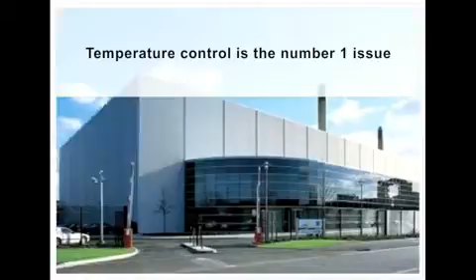Temperature control is the #1 issue faced by owners and operators of pharmaceutical warehouses. The Medicines and Healthcare Products Regulatory Agency, or MHRA, is the government body that controls standards within the pharmaceutical industry. John Taylor is the Quality and Standards Manager for the MHRA. He's the leading authority on this subject and is greatly respected by all parties in the industry.

We asked John, what's the greatest challenge facing the pharmaceutical industry with regards to the storage of medicines? Well, the greatest challenge concerning the storage of medicines is to ensure that products are stored under conditions compatible with maintaining their quality. And in this regard, of prime importance is the control of storage temperatures such that products are not exposed to extremes of temperature outside their labelled storage requirements.

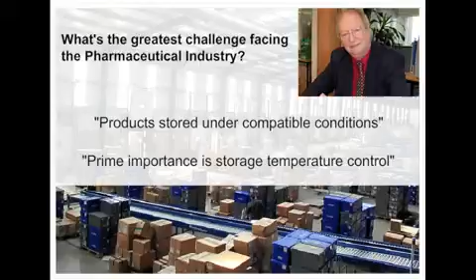Why has this all of a sudden become an issue? It's only during the last 10 years or so that regulators and industry in particular have recognised that distributors have a very important role to play in maintaining product quality from manufacturer to patient.

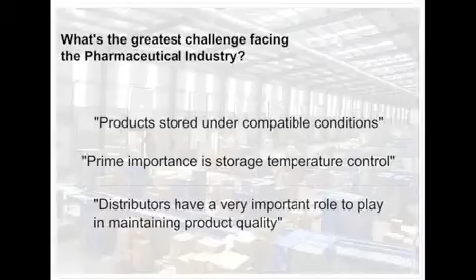The points raised by John are only part of the problem. There are other issues which not only affect the pharmaceutical industry, that add to the problem of temperature control. First, we're seeing great improvements in warehouse construction, and as a result of tightening regulations, buildings now require less energy to keep warm in winter, with the emphasis now changing to keeping them cool in the summer.

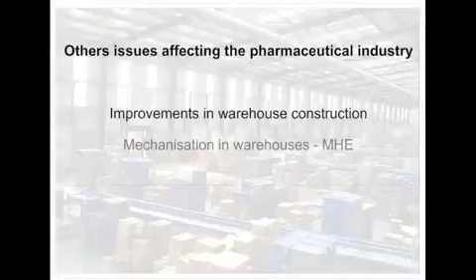Additionally, the use of ever-increasing amounts of mechanisation in warehouses and the addition of mezzanine floors means that warehouse temperatures are increasing. Add to these issues the effect of global warming. It's widely accepted that global warming is a reality, and summertime temperatures are set to increase beyond the record-breaking temperatures of the summer of 2006.

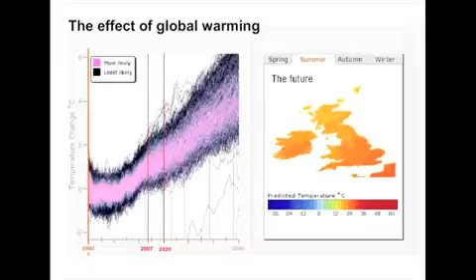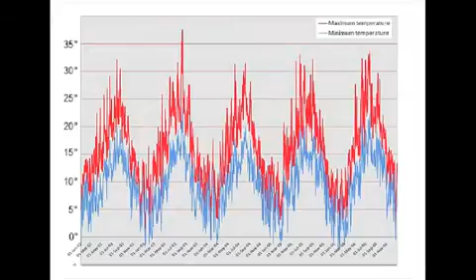Research shows that global warming is directly related to the increasing volumes of greenhouse gases, with CO2 being one of the main offenders. This graph shows outdoor temperatures recorded at the London Weather Centre. Typically, for a warehouse to comply with MHRA requirements, some form of ventilation will be needed once the outside ambient reaches 18 degrees. Once the external temperature exceeds 23 degrees, you will need to use some form of mechanical cooling to keep internal temperatures below 25 degrees.

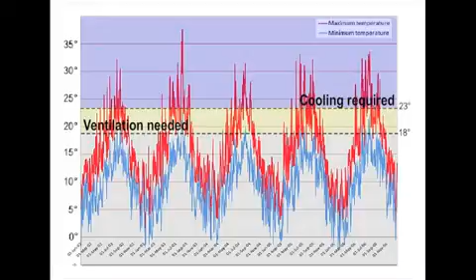As you can see from the graph, 18 degrees was exceeded on a significant number of occasions during the 5-year period, nearly 150 days per year in fact. Excursions above 23 degrees, although less numerous, occurred on over 60 days a year.

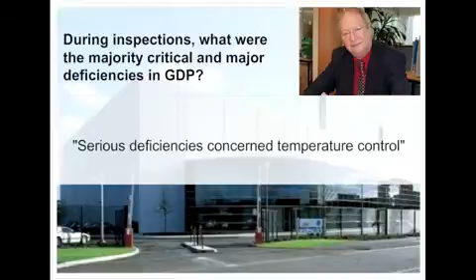We asked John Taylor to explain, during the inspections that were carried out last year, what were the majority critical and major deficiencies in GDP, and how were these failings addressed by the MHRA? Well, the majority of critical and major deficiencies, these we class together as serious deficiencies, reported last year, concerned temperature control and monitoring in general storage areas. It's apparent then that unless some form of ventilation or cooling plant is installed in these warehouses, it's often difficult to fully comply with the recommendations.

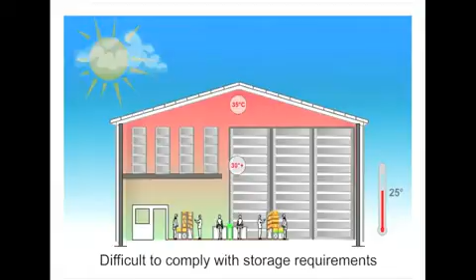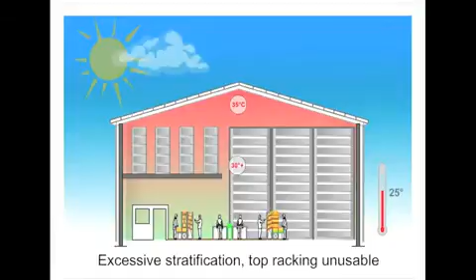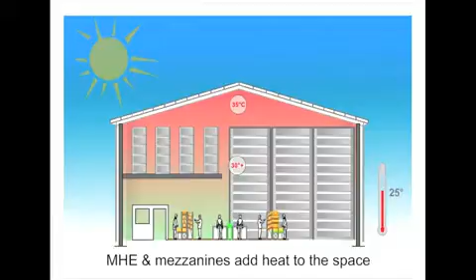Here we show a typical pharmaceutical warehouse in summer without any form of ventilation or cooling. What you have is excessive levels of stratification, as the hot air accumulates at high level in the warehouse, making the top levels of racking unusable for certain temperature-sensitive products. Some distributors have to relocate stock to lower levels and even put the stock close to open doorways to keep cool. This can be further aggravated where MHE and mezzanines have been added. A warehouse in the UK without either ventilation or cooling cannot comply with the manufacturer's storage requirements and MHRA standards.

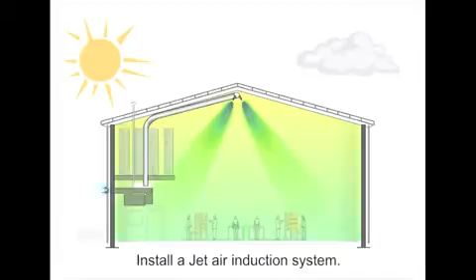So, what alternative do warehouse operators have? Install a jet air induction system. So, what is an air induction system? It's the most energy efficient and low carbon method of cooling and ventilating a pharmaceutical warehouse. The system offers even temperature distribution and minimal levels of stratification.

Temperature sensitive products can be stored anywhere within the warehouse without fear of being in breach of the manufacturer's temperature storage requirements. With its flexible design, the system is easy to modify if the warehouse layout is changed in the future. The system relies on mechanical cooling only when it's needed. At all other times, it utilises fresh air for free cooling of the space.

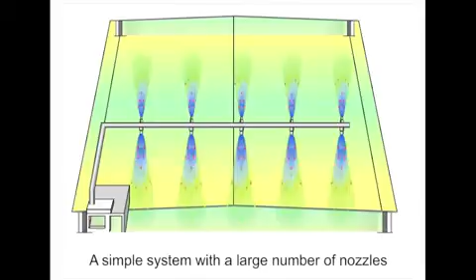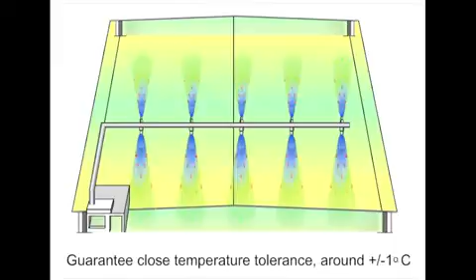Here's a plan of a simple system. As you can see, we have a large number of nozzles. As a result, we can guarantee a very close temperature tolerance within the warehouse, usually around plus or minus 1 degree Celsius throughout the entire space.

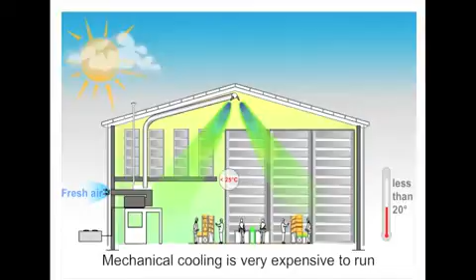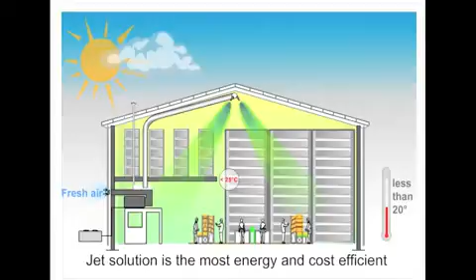Mechanical cooling is a solution to address the MHRA temperature requirements. However, on its own, mechanical cooling is very expensive to run, consuming significant electrical energy, producing higher CO2 emissions. The JET pharmaceutical solution is designed to maintain temperature conditions and meet MHRA standards, doing so in the most energy and cost-efficient manner.

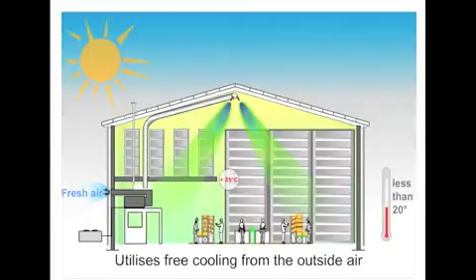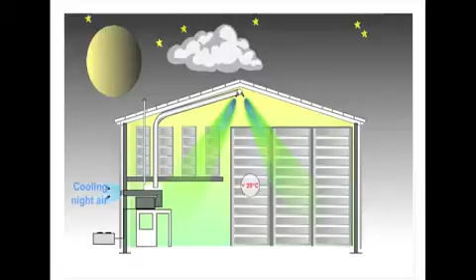The majority of the time, the internal warehouse temperature can be controlled at an acceptable level by utilising free cooling. Free cooling is where cooler outside air is supplied in large volumes to maintain the building temperature within its required parameters without the need for additional mechanical cooling. During the summertime, when there are high daytime temperatures, the plant will continue to run overnight, bringing in the cooler night air to lower the internal temperature of the building mass.

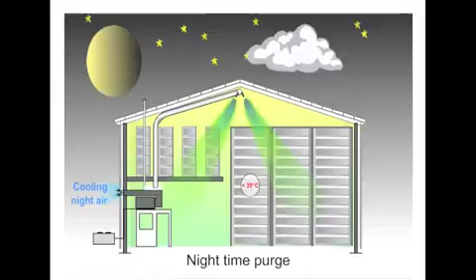When the space temperature rises to 25 degrees, the plant operates to provide minimum fresh air, as typically the outside air temperature will not offer any free cooling. At this point, the chiller plant will commence to run to maintain the required internal condition. As the outside temperature increases, the chiller plant will increase its cooling capacity until such time as a state of equilibrium is met.

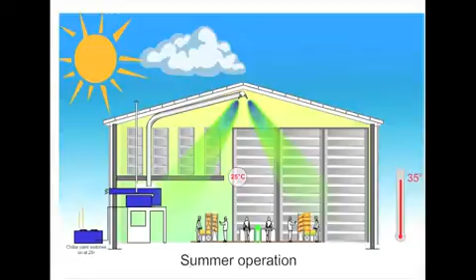For pharmaceutical warehouses within the UK, we design our systems to achieve an internal temperature of 25 degrees to comply with the MHRA requirements without factoring in mean kinetic temperatures to show compliance. Outside temperature is based upon 35 degrees. This we find to be sufficient with the current UK climatic conditions.

The temperature sensors used to control the system can also be used to monitor and capture temperature data for MHRA reporting purposes. The appropriate number of sensors can be incorporated in the system to deal with the more detailed temperature mapping which is required by the MHRA.

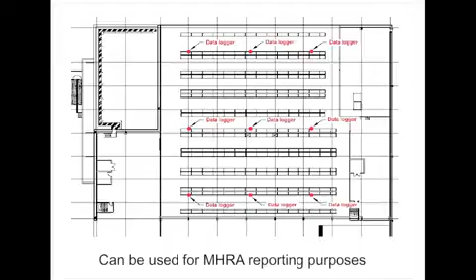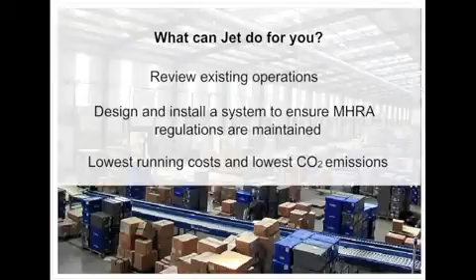In addition to supplying a ventilation and cooling system, JET can incorporate a comprehensive temperature monitoring and logging facility within the design. The controls allow for the operation of the system to be remotely monitored to ensure that action is taken in time to ensure the space does not move out of the desired temperature range. If required, the operation of maintaining, monitoring and reporting temperature can be outsourced to JET for the life of the building.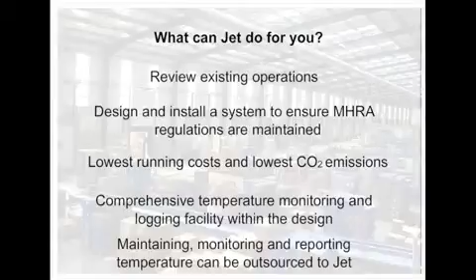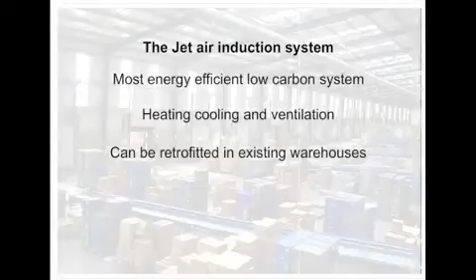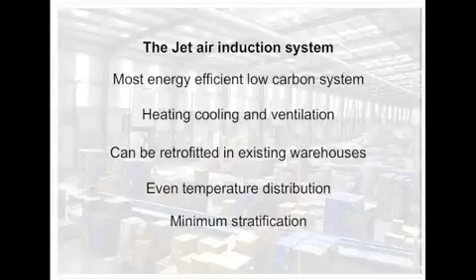The Jet air induction system is the most energy efficient, low carbon system available for heating, cooling and ventilating your warehouse to achieve compliance with manufacturers' storage requirements and the MHRA guidelines. The system can be simply retrofitted into an existing warehouse with minimum fuss and disruption. The system offers both even temperature distribution and minimal stratification. As all the plant is outside the operational space, there is no loss of valuable storage space or warehouse downtime during maintenance visits.

We asked John Taylor of the MHRA what happens when things go wrong and what actions can the MHRA take against those companies infringing the regulations. Right. Okay. Well, the most serious issue when something goes wrong is the risk that may be presented to patient safety through inadequate handling of medicines. But of course, there are implications for the company concerned. Expensive recalls, for example. We've had recalls costing in excess of £1 million.

Consequent loss of confidence in the company by its customers and also by the agency, of course. There can also be regulatory action by the agency in the event of serious non-compliances. This may involve suspension of a manufacturer's or wholesale distribution license, compulsory variation of the license to exclude certain activities, revocation of the license in extreme cases, or sanctions against the qualified person or the responsible person, the persons nominated on licenses as responsible.

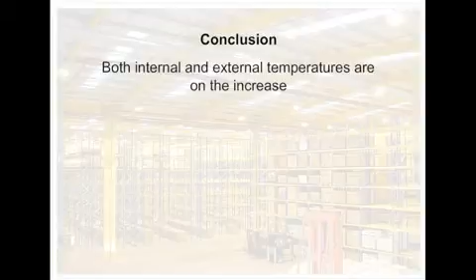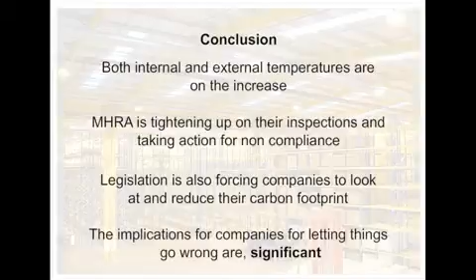To conclude, both internal and external temperatures are on the increase, and control is more critical than ever. The MHRA is tightening up on their inspections and taking action for non-compliance. Legislation is also forcing companies to look at and reduce their carbon footprint. And as John Taylor just said, the implications for companies that let things go wrong are significant.